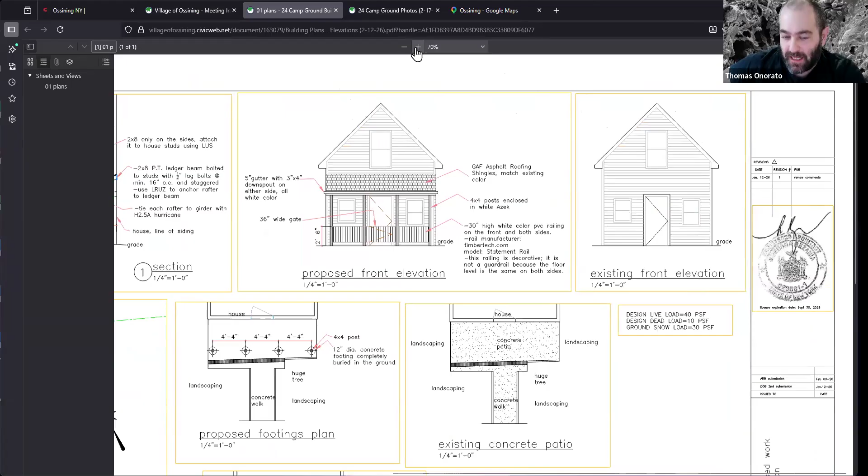Forgive me, I'm a biologist, not an architect, so this doesn't come as easy as cells and microscopes to me.

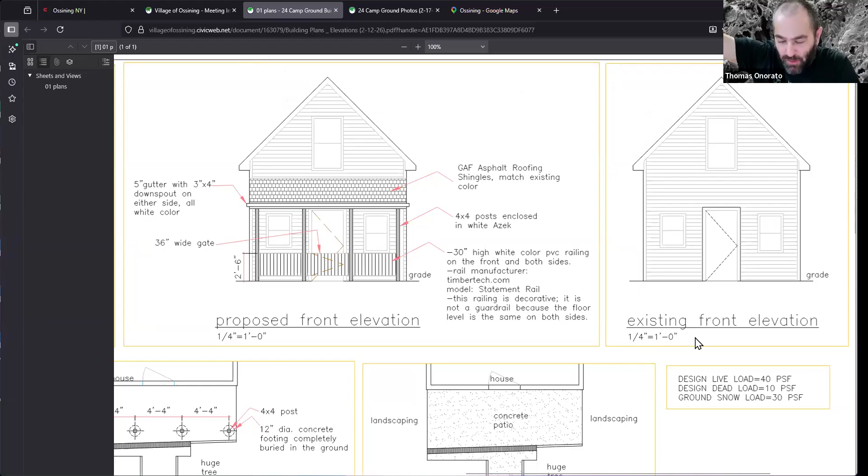Basically we're going to put 4 posts. After I shopped around for architects, they said because it's only about 8 or 9 inches of concrete, you need the regulations of the footings below the frost line. That's why they're going to put the 4 studs you see in the diagram, with the concrete so it's nicely supported, and then decorative railings from the materials the contractor already did.

It's going to be just standard white and vertical, simple. I could always decorate it with flower boxes and stuff, but I wanted to keep it simple because I had hornets, and I don't want decorations where they can make new nests. So I kept the design very simple.

It'll come out and cover up towards the concrete without the big tree interfering, so it'll be a cute little covered porch that I can sit in and decorate for holidays.

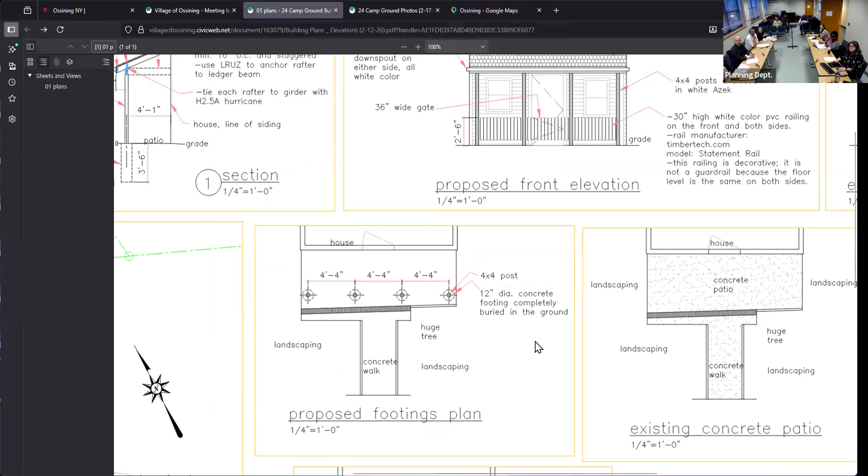I don't know how much more technical detail you need me to go into. No, that's perfect, thank you so much.

You also noted for the record that the association has already reviewed and approved this, which is helpful for this board. Yeah, that was the easiest part, that was August of last year they already did it. So we'll try to make today easy as well, as long as we have all the information, which it looks like we do.

I want to open this up to the board for any questions about the scope of work. Yeah, I have a question.

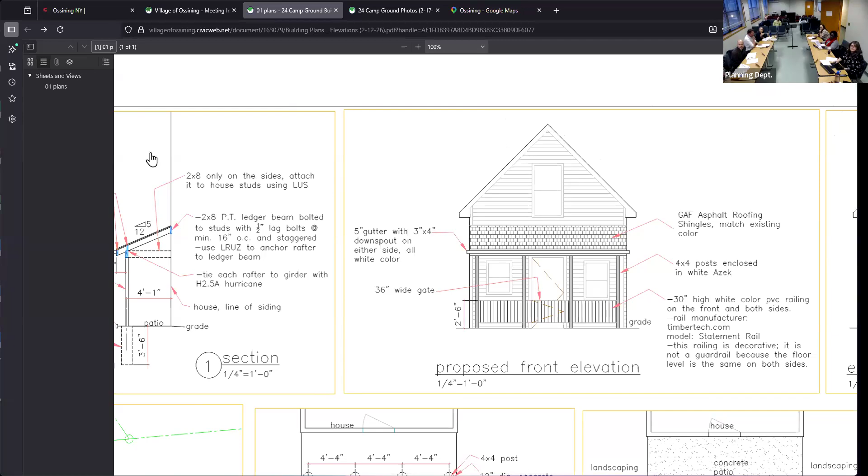Can we go back to the very first picture, the photos? Keep going up to the top. Yes, this picture here, if you'd scroll it down a little, Maddie. This roof that's overhanging, I'm sure it's just a perspective issue, but I'm wondering in relationship to your porch coming out, is there any obstruction? No, that's a perspective issue, that's the other house across the way.

The roof line, from what I understand from the architect, is going to come just a little bit under the loft window on top where your arrow is. It's very, very small, only 60 square feet total. You see where the little drainage grates are? The posts are going to go before that, like where I had the bag of stuff I was giving away. So it won't interfere with them or their roof. Okay, I just wasn't sure what I was looking at.

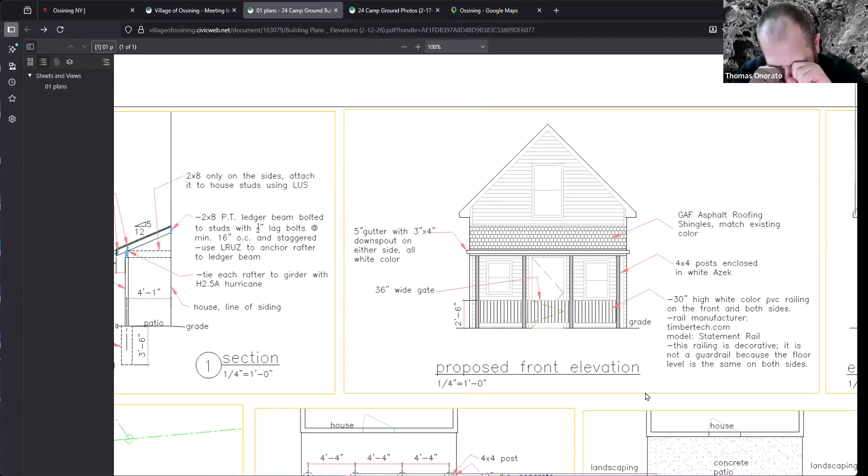Thank you. You said all the fencing and the verticals were white, right? It was like a white AZEK. Yes, I went with the AZEK, the PVC coated wood, because it's easier to maintain so you don't have to worry about it degrading over time. It's just less maintenance.

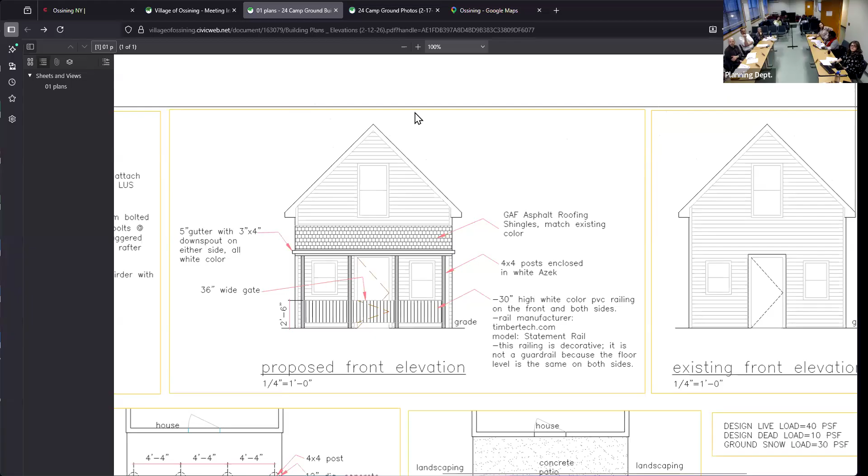Great, and it's a white aluminum gutter? Yes, white color, I think all those materials. Whatever the shingles are, I forgot what color I chose, but they put it down in the plans, so the shingles won't be white. Existing, right, so you're just going to match what you have on the house's roof. Yeah.

Okay, all right, any other questions from the board? Go for it. All right.

No, you. No, we're good. That was me getting ahead of myself.

Any objections? No objections. The motion carries. We're now in a public hearing. Is there anybody in the attendees list who would like to speak to this application? You can use the hand raise function. Don't see anybody there, and didn't see anybody in the room previously.

Can I have a motion to close the public hearing? First, I make the motion to close the public hearing. Rich Klein, second. Any objections to that? None heard. All right, the public hearing is now closed.

I think this application was very sufficiently described. The materials are clear, the drawings were clear, and it was approved by the condo association. With that in mind, can I have a motion to approve the application? Rich Klein, motion to approve. Michael Aronson, second. And a roll call?

Michael Aronson, aye. Eric Talbot, aye. Richard Klein, aye. Pamela Nelson, aye. Holly Thurston, aye. And Chair Roy... let's go slower... aye. Thank you very much.

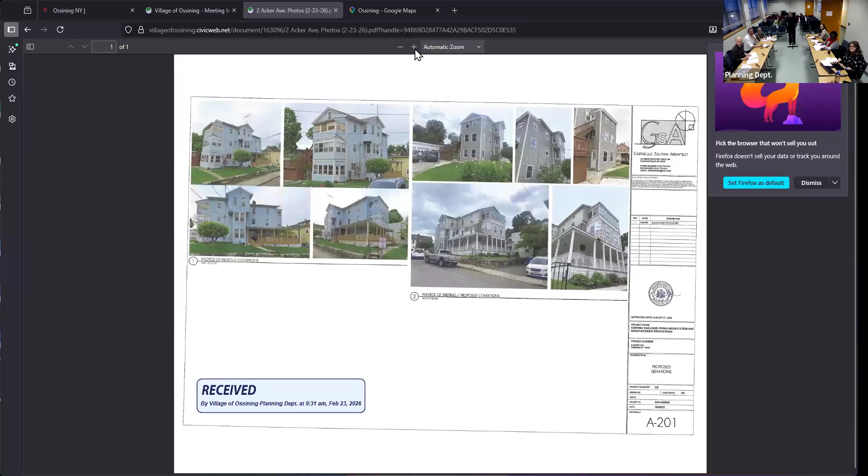All right, so that roof, and we should probably also look at the drawings as well, but before we move over there, let's get a visual so you see that the 3rd floor porch had a glass enclosure, but that was replaced with a regular window and winterized. And what was there before? It was just open space.

Do we have that photo? Those look like the same photo, right, where all 4 views are almost equivalent. Well, the new one is where the windows were replaced, which is this one on the right side. Yeah, right, it's actually in the middle, that one.

So previously it was like a double window and a single, that was fully sided in. So yeah, it was previously all those windows and those porches, and now they've been enclosed for living space, is that correct? Correct, and there was a small alteration in the kitchen.

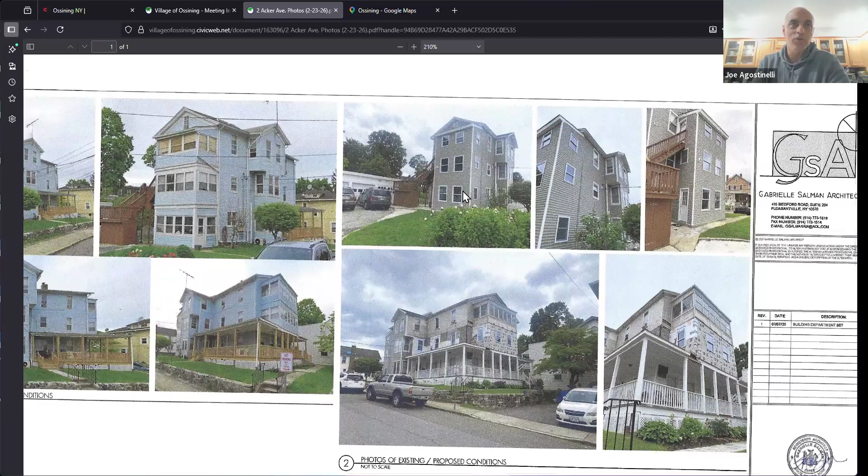So they're trying to satisfy the violations now by going through the process of legalizing this, but it basically changed from what you see in the pictures on the left to the right, because they continued to work until they got to this point, and eventually they stopped and got court appearance tickets. Just a little remark, I don't want to excuse the client for doing work without a permit, but the building was open to the weather, to rain, so he had to cover it in order not to lose it.

Yeah, no, I mean, for the purpose of this hearing, we need to look at what's being proposed to be built and make sure that is appropriate. Maybe we can move over to the drawings.

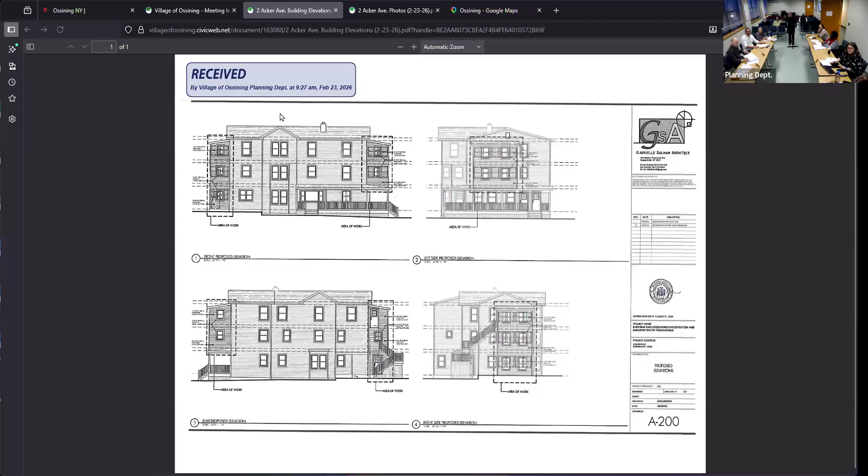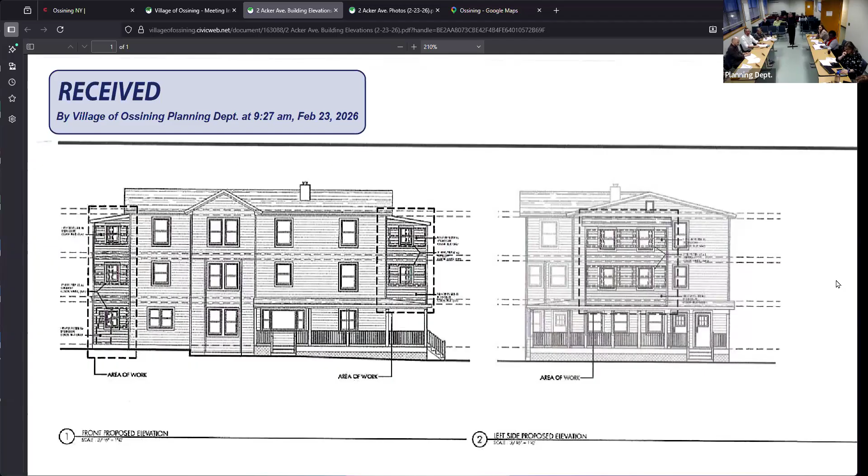So I guess those boxes are showing the proposed area, the proposed changes. And the siding is being replaced throughout the entire structure so that it'll all be uniform. Any other windows being fitted as part of this work, or is it just the windows in the box areas? All of the windows being replaced throughout the entire house. Okay, can we go down just to the next row of drawings, because this is just the opposite two views.

And all of the exterior woodwork is being painted white, it looks like from the photos, or is it a natural wood color? It looks in the photos like that porch on the right bottom, which was previously a brown wood color, is being - the trim is white, but the stairs remain pressure treated.

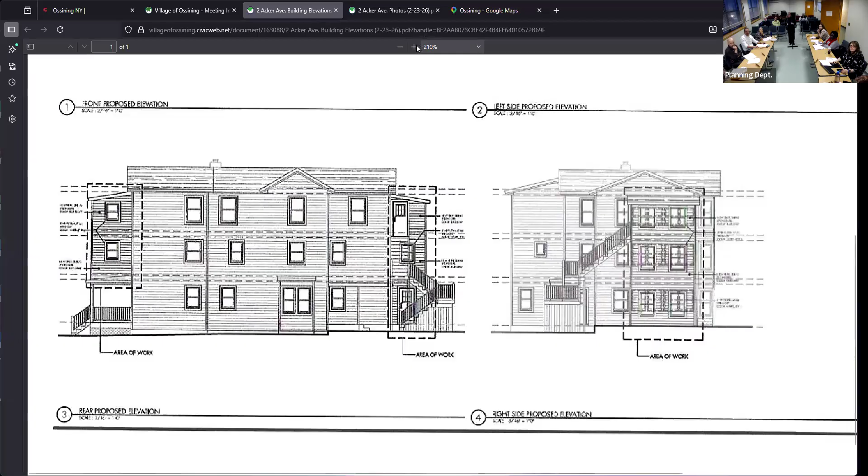Board members, well, I just have questions. I'm a little confused as to - could you just identify what work is already completed and what work is left to be done, because I'm a little confused from looking at the pictures. All the siding and window work is done, the work inside on the kitchen is not.

In terms of exterior work, all the exterior work is done, so what we're looking at is the finished product, minus any touch-ups or trim or what have you. And then the interior work, as you said, we're not really reviewing.

Just in terms of material, the revised massing - any comments in terms of the size? It looks like you're not adding any square footage or volume, it's just the incorporation of those porches. Any comments related to that from the board?

I guess it would be helpful just to clarify that the stairs are going to remain as they are, or will they be painted? That would be helpful. Right now they're remaining as they are. If you would like us to paint it white, we would do it. Not necessarily - no, I actually don't think I would want that. It is what it is, so at this point I feel that it seems okay.

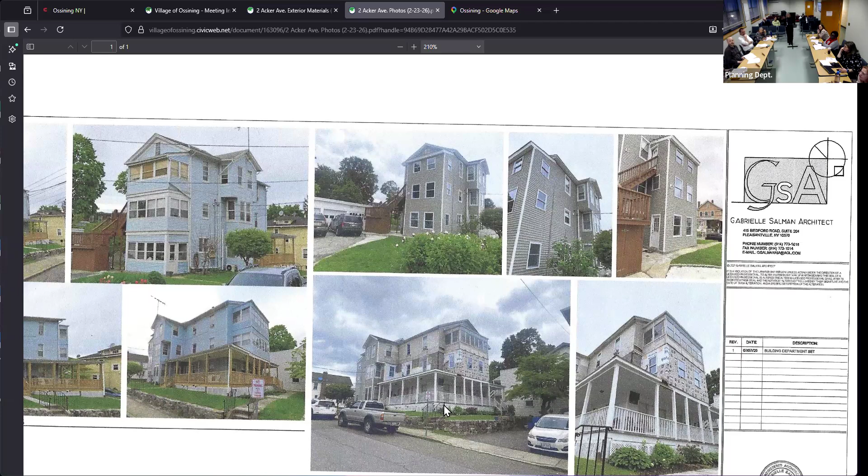It seems like the enclosures are unified, yes, and it's much better looking than it was before. Yes, I would agree. I would agree with that too - that's looking unified.

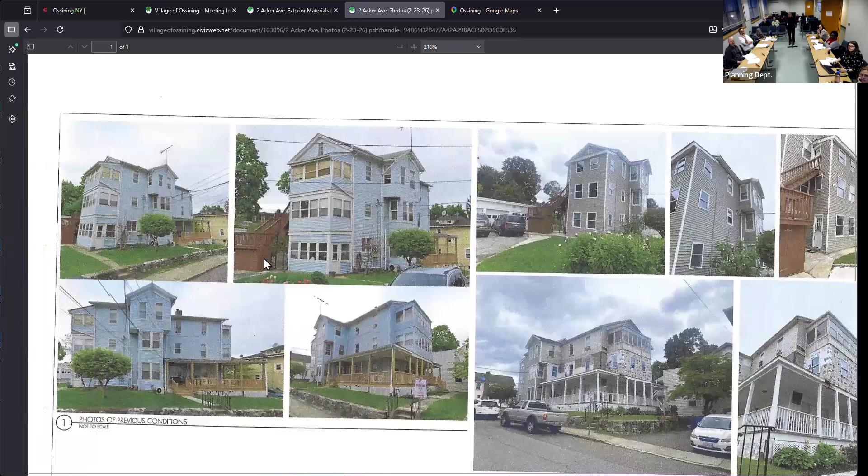Can I ask you a question? Is the staircase staying? That is staying on that - pressure treated, it's that pressure stain, yeah, okay. So what we're looking at, I just want to be clear for the record - what we're looking at in that photo is the final design intent. That's what's built. So, got it.

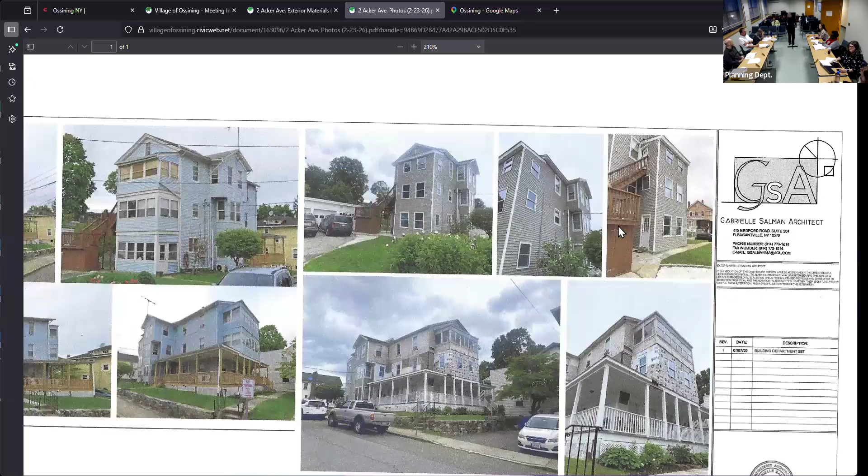Is there anybody in this room who'd like to speak to this application?

Don't see anybody. Is there anybody on Zoom who would like to speak to this application? You can use the hand raise function. I don't see anybody.

So just before we proceed, I think everybody on the board, from the comments I've heard, there's a comfort level with what's being proposed. I personally agree, I think it's a lot nicer than what was there before. It's a shame this didn't come to this board for that opinion beforehand, because there's a lot of risk, you do a lot of work, and if it's not appropriate, you could potentially have to remove stuff.

But with that being said, can I have a motion to close the public hearing? Eric Talbot, I make a motion to close the public hearing. Rich Klein second. Any objections to that? None. All right, the public hearing is closed.

So based on the conversation we had, I don't know if there's any conditions, but I think in the resolution we can refer to the photographs for the examples of finished materials, including the wood stairs, which was something that came up in the hearing.

Can we have a motion to approve the application? First, I make the motion to approve the application. Rich Klein second. All right, we'll do a roll call.

Michael Aronson, aye. Eric Talbot, aye. Richard Klein, aye. Pamela Nelson, aye. Holly Thurston, aye. And Chair Seth Roy. That was very good, much faster.

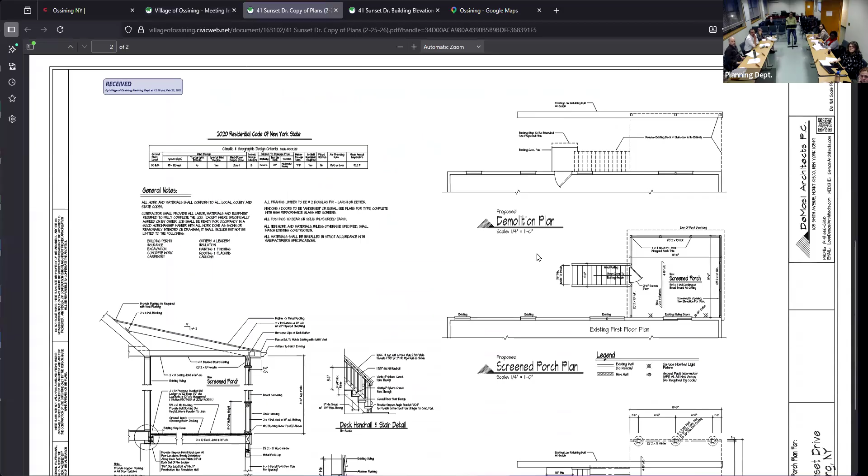All right, and do we have drawings of this? Yeah, so I didn't realize we had to come to the architecture board to replace this, so I don't really have elevations, it's just a detail of structure and a section. But all the materials are gonna be white. The roof is gonna match the existing shingles, the material is gonna be AZEK, and the screens are just basically black screens. The posts on the bottom are gonna be pressure treated, and stay that way. That's basically it, it's just an elevated roof structure covered with screens.

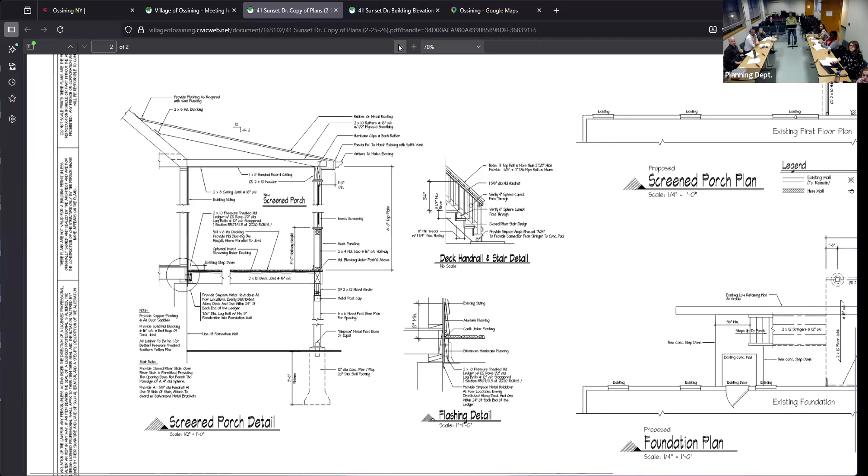Is there a plan view that shows the degree to which this is being enlarged? Sure, it's right there, so it's 2 foot bigger. I mean the piece you just referred to, I don't see any elevations, just to get... Yeah, because we were replacing it, just made it a little bit bigger. So you can see from the pictures what it used to look like.

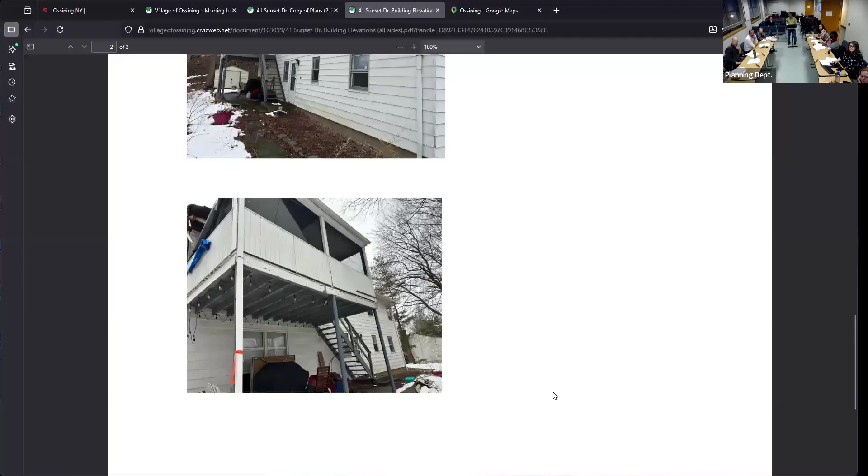And it's replacing it. I'm gonna put this out to the board. Oh, I was gonna say, I wanted to see what it... this is in the back, right? Yes, go ahead Rich. I answered his question, you said it was in the back. So it's still gonna be elevated, yeah, as is, but screened in completely.

Just on the top? See how the bottom is open? The bottom's open, the top is the part that's screened in. Okay, is there any change to the side base? Because right now you're making that larger, are you adding any mullions, or the same? Yeah, there's gonna be broken up mullions in between, because the screens can't get too large. The posts on top are gonna be wrapped in AZEK, the ones on the bottom are gonna stay as pressure treated.

And what about the stair? Stair is gonna be white.

Are you doing anything to the siding on the house? Is that stringer in front of the siding? Yeah, we're gonna replace the siding, and also on the other side, because it was damaged by the tree, that needs to be replaced too, in kind.

Are you making any changes to that door and window down there for the stair? I'm assuming you're making the stair less steep, or moving the stair over so it's not touching the house, and we're gonna patch in that siding. Nothing's gonna be changed for the window or the door, we just go back to the plan.

I'm struggling a little bit with the elevations, but I apologize. No, no, it was just a replacement, so more just opening up to this board.

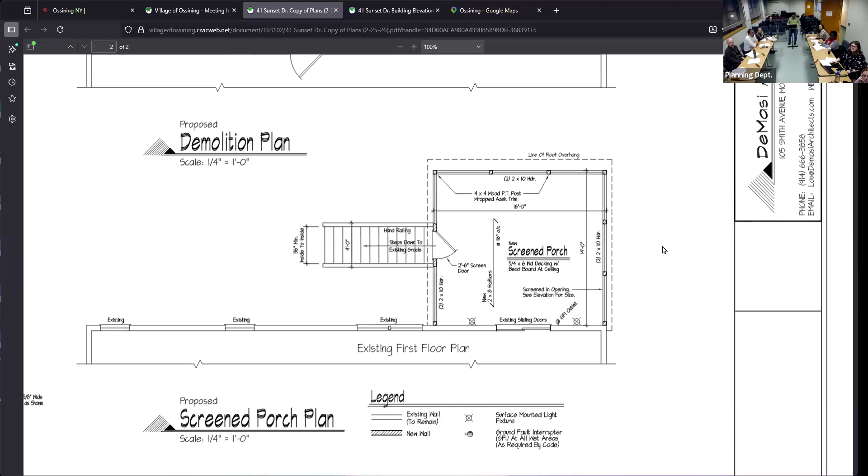I'm just one person here, though. But I think if people feel like this is a little bit of a hardship for the owner, it's sufficiently described, so it overhangs the footings, okay?

No, the footings are gonna be flush, just like it is now. We're replacing the footings because the footings were undersized, so they need to be replaced. So we just thought to make it a little bit bigger would be better.

And we're conforming to setbacks. It's not an issue with setbacks or anything like that. No variances, no variances.

So I guess the question for the board at this point is, the materials are described and the size is described in plan, so it is defined. I'd like to be evaluating the architectural impact, it'd be good to see drawings of what's being shown here, we always ask for drawings of what's being shown here.

We do have the photos, but I would like to get, if people on the board feel that what's been presented is adequate, I want to have that conversation. I think for this project it's adequate, I don't think I need to see anything else.

I mean, I would prefer to have the elevations, but again, I don't want to hold it up. It's tough because we're not seeing what we're really approving in terms of.

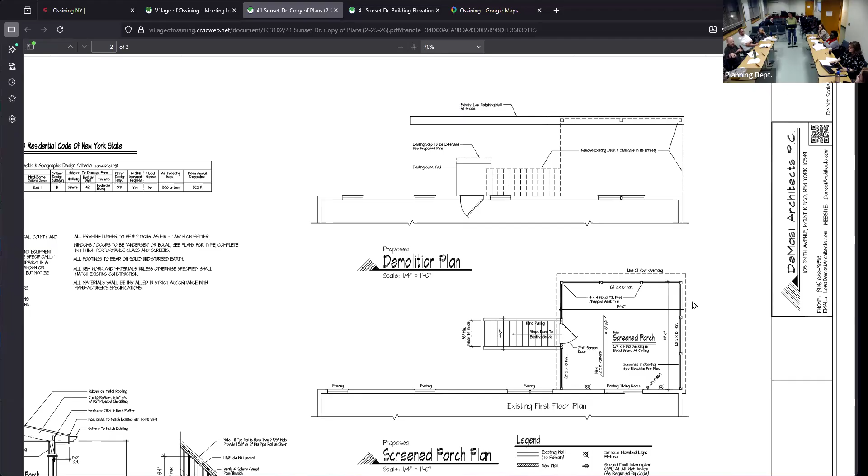This is not a big extension, it's basically just a replacement in kind. But I do agree with Michael that it is hard to approve something that you can't see, but I do think you provided

Yeah, for me, was this neighborhood built clearly as a development? Because it looks like at least this house and the one next to it look the same. Yeah, and the one on the other side is very similar, some sort of course, up the street, a little bit different basically. Yeah, I know it's true. Actually, it's Sunset, it has the name, you can see the sunset from there, it's pretty.

Nice views. And Holly, Pam, just any thoughts on the documentation? I think for what it is, I'm fine with what was provided. Okay.

We have a motion to open the public hearing. Eric Talbot, I make a motion to open the public hearing. Second? All right, any objections to that? We're now in a public hearing. Is there anybody in the room to speak to the application? I do not see anybody in the room. Is there anybody on Zoom? Use the hand raise function if you'd like to speak to this application. And I don't see that.

All right, so the project has been described in photograph, in plan, and in section. Materials are clear, and the size, to me, we're evaluating scale. I'm a little bit torn on it, but I'm hearing what everybody's saying, I think kind of taking a pragmatic approach on this one.

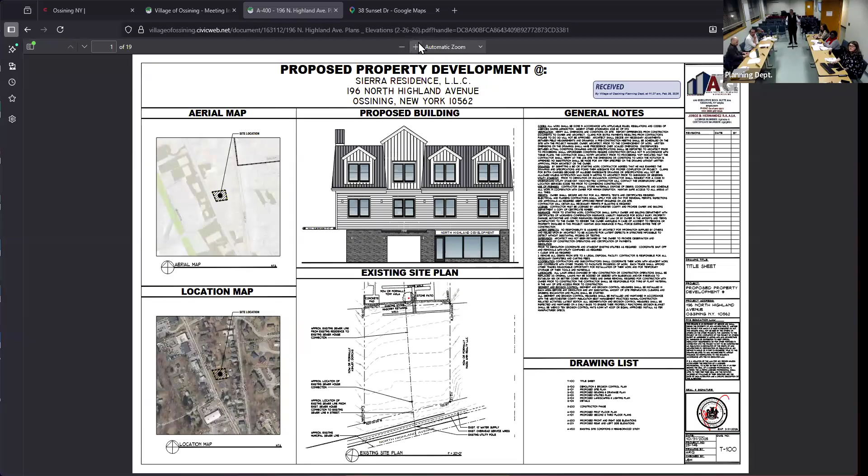Like I just mentioned, this project was in front of the board under prior ownership, and in 2019 it was approved, architecture review board and site plan approval by then. We came back since this is new ownership. There are slight changes to the building design, interior-wise, addressing some of the comments we had originally.

This is going to be a mixed use building. It has 8 units, six 2-bedroom and two 1-bedroom units, and we need to have 557... One of the comments from the last time we were in front of the board was that the retail space was too small, so we almost doubled the size. We created 775 square feet of retail and an office in the rear also for rental.

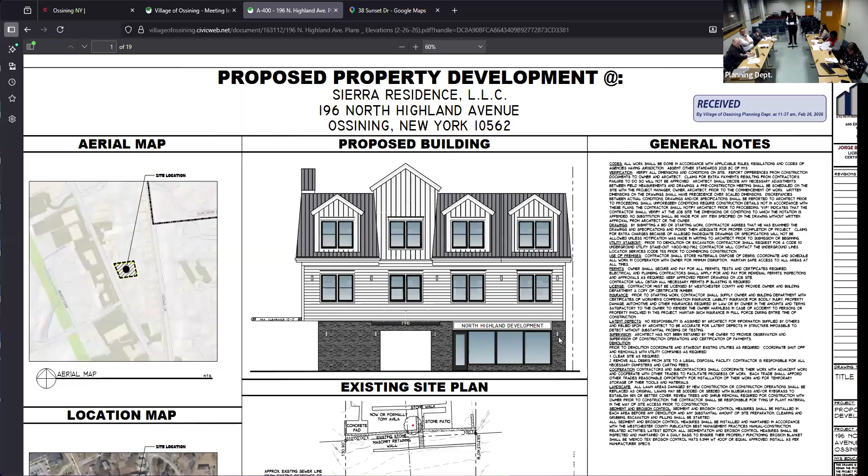If you want to move to that site plan... okay, go down. That's the existing site plan, right? Yeah, that's the plat. The site plan, there, continue down.

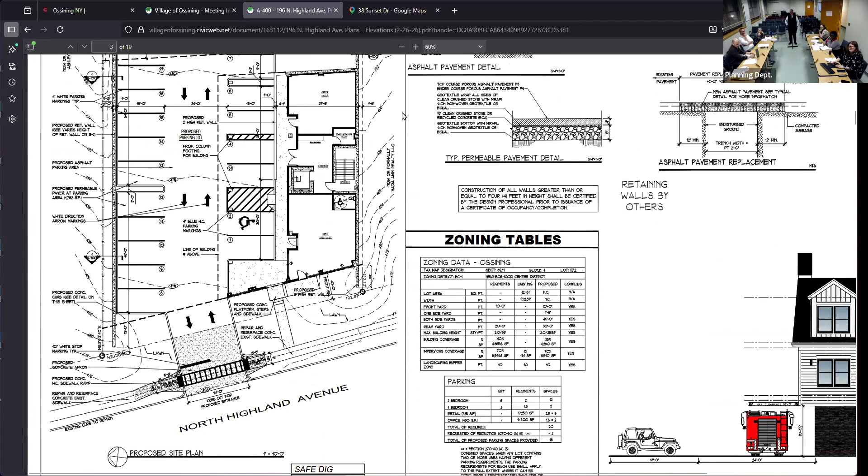So we do have 18 parking spaces. Now that we increased the retail, the commercial portion at the bottom, we are asking for a reduction in the combination of parking spaces needed. Since we need 15 for the apartments and 5 for downstairs, and since downstairs will be open during the day and closed up in the evening when most of the apartments require their parking, we're seeking a reduction of 2 parking spaces.

There are things we have done since we started this time with the new ownership. We already did the testing for the stormwater that in the past we haven't been able to witness or work on. So now it's done.

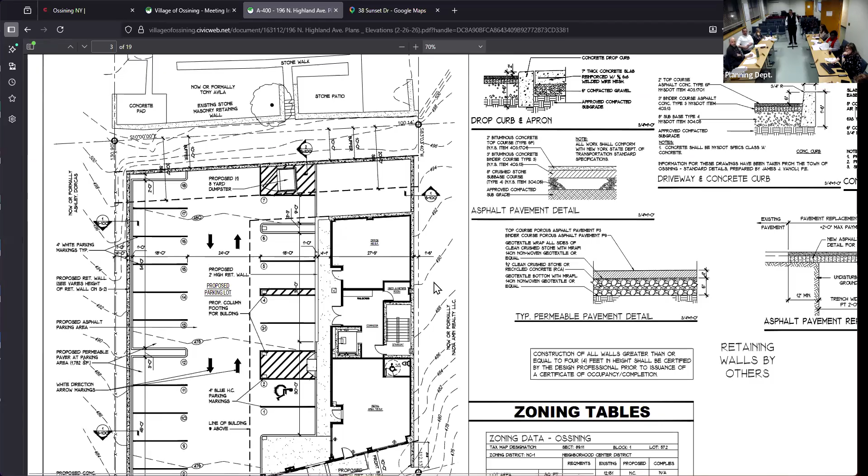We are also moving to file with the DOT for the curb cut, and we are working to secure the easement relocation for the easement existing for 25 Cedar Lane, which is the property in the back. The easement, that got brought up, and I think that'll be part of our conversation.

Can you just describe what easement you're talking about? There is an existing sewer easement. To give you a little history, 25 Cedar Lane and this property at one point were one, and there's the connection to Highland Avenue from the house on top. So there is an easement that right now runs through the center of the path. We will be proposing to shift that easement to one side in order to do the construction of the building and have no issue in the future with the easement.

There's also the exploration of whether we can connect now to the Cedar Lane sewer for the house, which is another thing that's been in play. The house on Cedar Lane has their sewer connected all the way down to Route 9, which is in your way effectively. So one thought is if that house can be connected onto the sewer on Cedar Lane, then that's no longer an issue for this.

Yeah, got it, so that's one thing we're looking into. Otherwise, we will have to redo the easement. We still give them the easement, but it will have to be moved to one side or the other of the property. Right, so it's understood, that's a major issue, obviously.

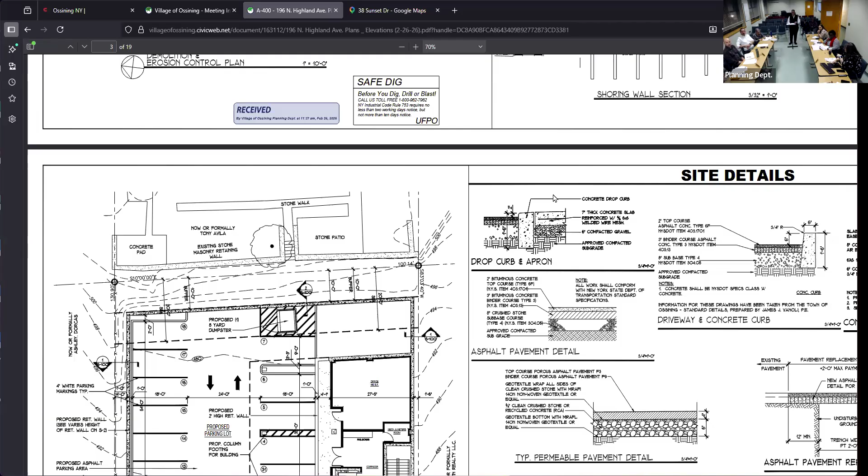Okay, so it sounds like there's a lot in play there. I think I do see a hand up, so I'm not sure if that's someone who wants to comment, or if that's someone on the applicant team. I think it's the applicant. Okay, so applicant Kimberly can definitely come in.

Just one quick question on this. There's an existing line from 25 Cedar out to Highland Avenue, so it's operational? Yes. Not needed for your project? No. So if in fact you were successful in getting this easement, with 25 Cedar having their own hookup, would you actually remove that sewer line as part of this project?

Yes. But that's all I know — right now, the easement is what stays there. Again, if we can resolve the issue, because there's a lot going on with Cedar Lane, sewer, the location, the height, and we will need to have the neighbor. It's marked as an important obstacle to the site plan at this point.

Do you have a copy of that current easement agreement that you could submit to the board for our review? Yes, thank you. It was part of the original subdivision, but we'll submit a copy of that.

I see the applicant has their hand up. Mr. Marco, did you want to add anything on this point? I think you're muted, so we can't hear you. Is this the neighbor or the applicant? Louis and Mario at the bottom are the applicants. Oh okay, so I thought Kimberly is not part of the applicant. I apologize, Mr. Marco — we're actually going to open a public hearing in a moment, and then we would like to hear from you, but I'll tell you to hold off just for a moment, and we'll bring you back in a second. Okay, great, we misunderstood.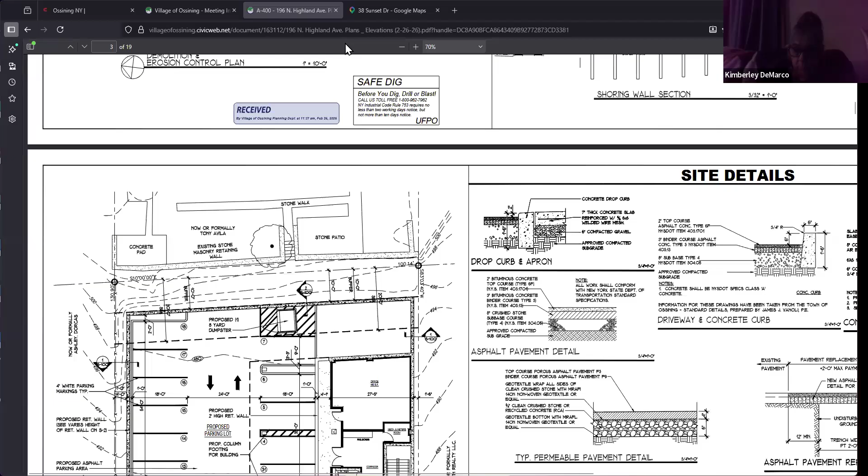Go to the A101, I guess. Yeah, keep going, just sequence through it.

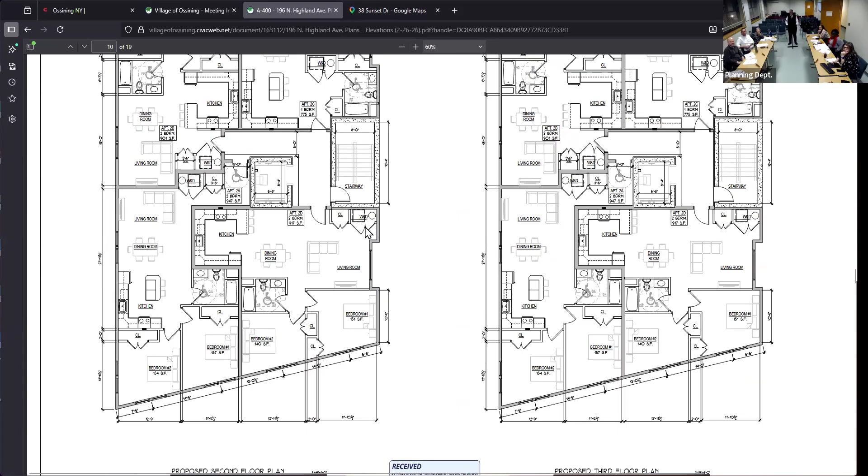So see how it says 2-bedroom apartment? That one says 901 square footage. Well, there's other ones that are one bedroom, 775, two bedrooms, I think. We will double check the numbers, but we're comfortable with that, because we did modify the floor plans internally too.

So the bedrooms need to be 900 square feet for a 2-bedroom and 750 for a 1-bedroom. Okay. We have 947, 917, but the one is 775. I don't know, I have to look at the plans that I had, because they were different. All right, so just take a look at that, and let's just confirm.

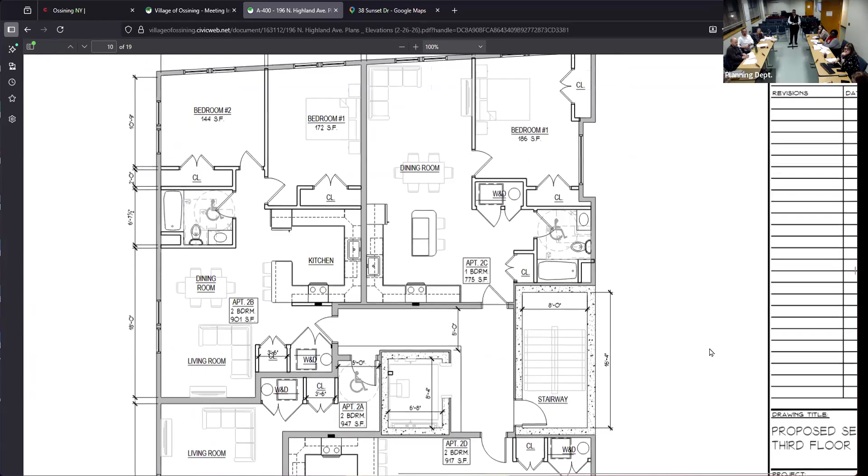This is item 140. Other items on your list, so sorry. The other thing is the fire department, I think we left that off. That we still need to figure out in terms of emergency access.

Because some of the apartments are going to be accessed from the rear, so we just need to probably get some sort of review on that. And then the landscaping, the last time we talked about that, we still had some replacement plants that we were proposing, and then also in terms of irrigation, maintenance, all of that.

Accessibility too, right? Because some of these were way up on a hill and how they were to be accessed. Trash location, we still had issues with that.

Also, then the sewer easement we already talked about, and then the last thing I wanted to raise is that last time you were before the board, the BAR had some concerns with the overall architecture of the building, as well as the proposed square footage for commercial space. I think both of those are still outstanding, because I didn't see any major changes within the plans themselves.

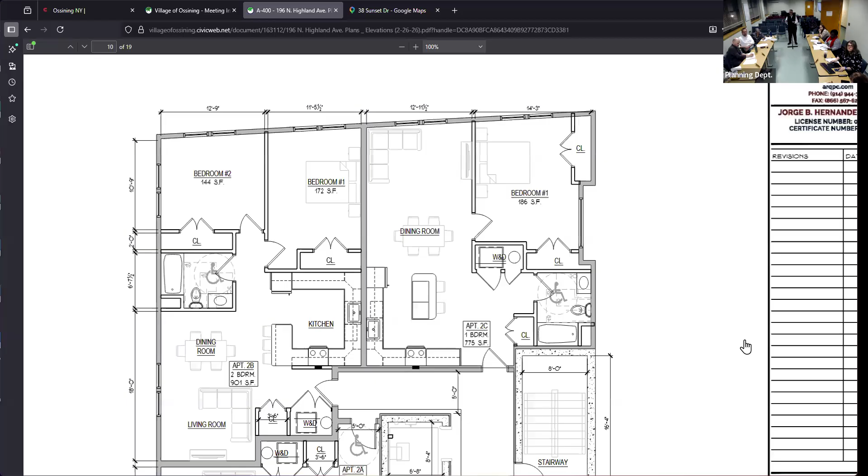Well, we did change the commercial space. You're still noting that it's very small compared to the rest of the building, right? Less than 10%. I think the whole point of it is that this is a neighborhood center 1 district, which is supposed to have non-residential on the bottom, with the ability to have residential above. I'm trying to understand, before we had 557 square feet, now we have 1,200 square feet.

Well, that's the thing, because right now if you scroll up, you have 735, but then you have office. But it's not really clear what that office space is, how that's going to get accessed, and it looks like maybe there's room to put a bathroom in that office space. You're showing one in the commercial space in the front. I think the concern is whether these are actually viable commercial spaces.

Yeah, that's just a concern. I mean, I guess the whole point of the emphasis with this project, and I'm just raising it, is on the residential piece and not anything else, and this is a commercial corridor. That was one of the main thrusts of the conversations the last time this was in front of the board.

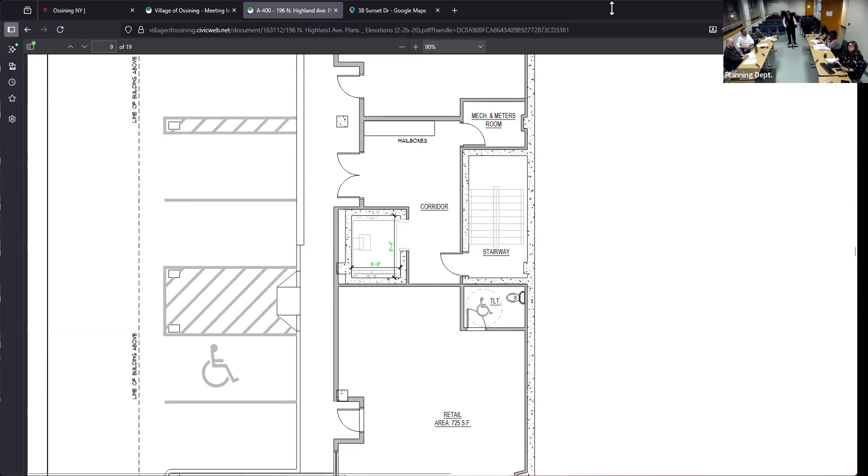And I'm just highlighting the BAR component, and maybe we just put that elevation up there, because it still throws me off every time I see it, and I think maybe before we never got to the point of seeing some additional renderings. But yeah, that top drawing, because one of the things that was always kind of tricky to understand about this project was the cantilever.

So the building is, the northern half of the building is cantilevered, and then the parking lot continues. But in order to enter the parking lot, I guess that pier, you see that stone wall, which stops awkwardly. And we've talked about resolving that. Was probably one of the main issues. It just looks weird.

It's kind of resolving that building elevation with your parking entrance, and I don't know that that was really ever done. And I think the north elevation of that same parking is somewhat disturbing.

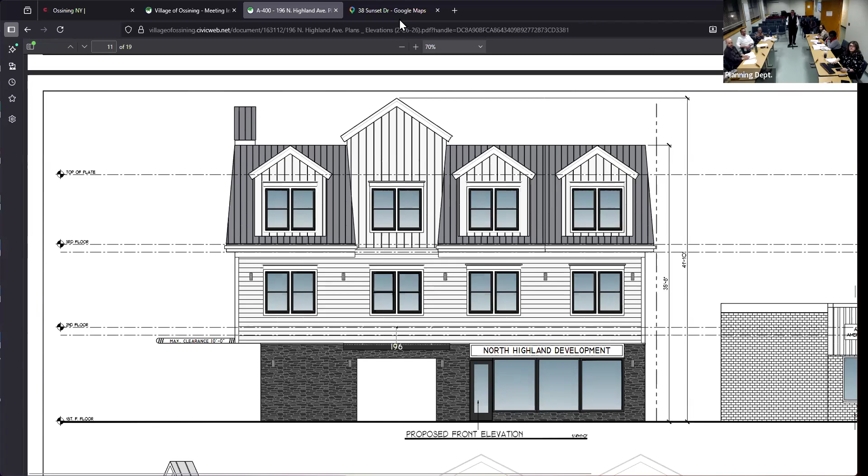I'm not clear, not that drawing, there was another one. Is that the north elevation? Is that the left side? Yeah, so I'm not sure what I'm looking at with that wall - is the parking on the other side of that wall? And what are those doors leading to? Are they leading to the commercial space, or is that the parking behind it? It's not clear. We can give you a section through that, so.

And I also, I'm not sure about the sort of ski Swiss Alps toppings in the middle. Well, I'm sorry if I'm not using proper architectural language, but those seem a little bit out of scale - the dormers. Thank you.

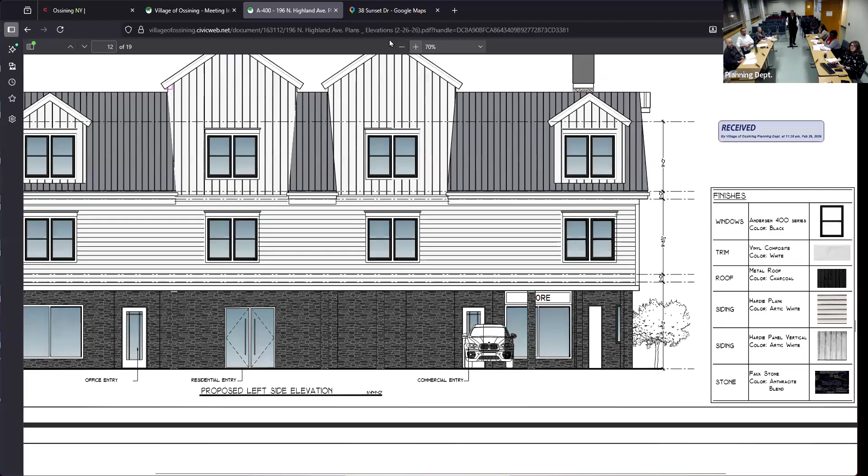I'm not aware, certainly when I was on the board, there was no - the last time this was in front of us, there was no approval. No, there's been approval, because this was approved originally. You said 2019, and I think that's before - certainly before. Right, it's a new application. I don't remember it, I think I might have joined. Okay, so I remember.

I'm not opposed to making changes, but we presented to the client something and that's what they wanted. So I want to make sure that when I go back to the client and talk about these changes, I'm not misrepresenting that the architectural review board approval has no expiration. Is that true?

No, that approval isn't for this project you have right now in front of you. The BAR project has not changed, but the site plan has changed. They're tied together, but for all intents and purposes, it's a new project. It's not the same project just because it's on the same site.

So for my own edification, since I was told a few times in the past that in architecture BAR review, if it's a BAR standalone application, that's different, right? Like if you're doing a small addition to your home. But this building doesn't exist, so you don't even have architectural approval for a building that doesn't exist.

Okay, and we're going to take a look and see what was specifically previously approved, because if it has a resolution, if the site plan has changed, the site plan and the BAR are intertwined, they're related. So we'll take a look and see what was previously approved.